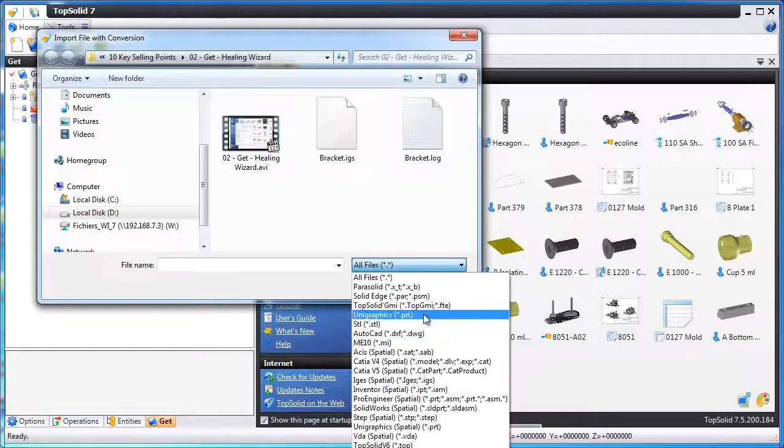First thing we'll do is import our IGES file. We'll change to IGES, select the file that we want to import, and validate. TopSolid 7 goes to work and imports the IGES file. Here you see it show up in our project tree.

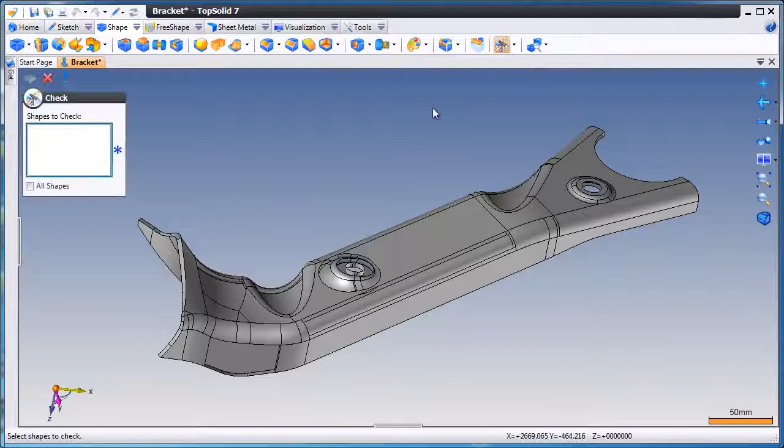Now let's take a closer look at the model. Maybe the first thing we want to do is run our healing wizard. First we want to check the geometry for errors. There are none, so we'll continue and have TopSolid automatically try to sew it. Here with these orange edges you see all the areas that are currently open, and we even give you a list telling you there's 10 holes open.

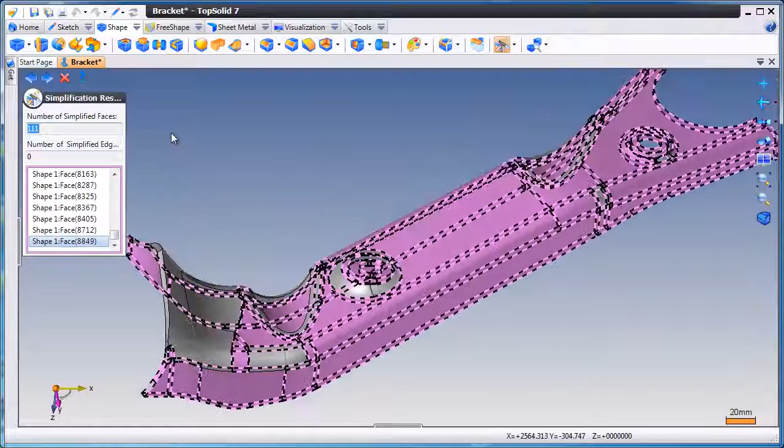Next we'll try to simplify all of the geometry as well. And finally we'll do one more check for anything that's invalid, and like that the healing wizard is complete. However, we still have work to do. First, to make things easier to see, we're going to change the color.

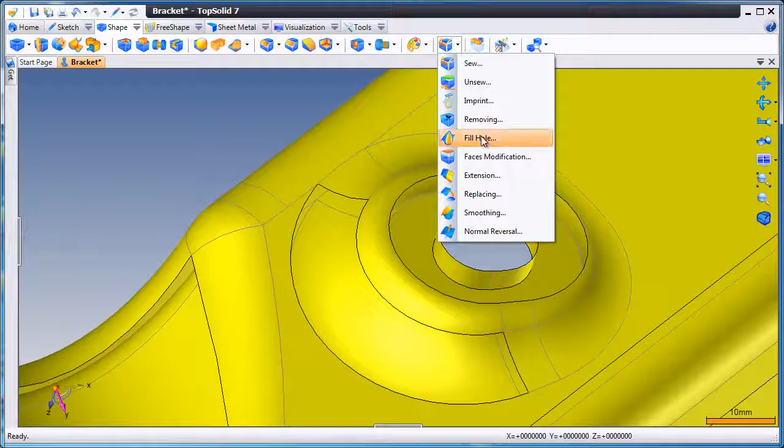Now let's see if we can close up some of these gaps. Maybe we'll start by choosing the fill hole command. As we fill holes, the software will automatically sew it to the model. And like that you can see it looks like those surfaces belong there as part of the native model.

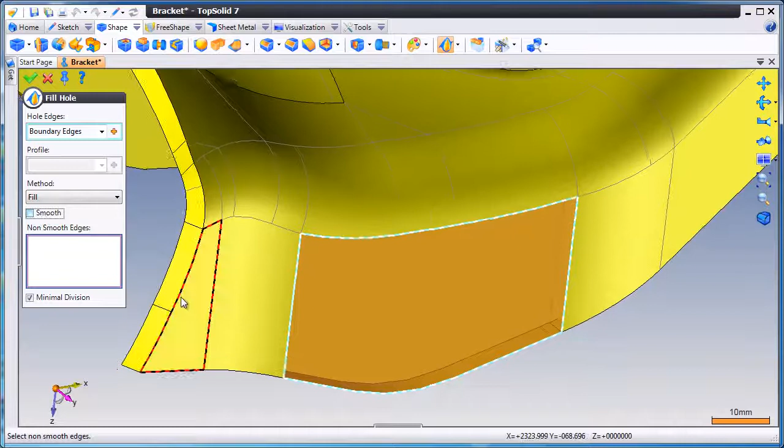Now let's go to this area. At first we don't see a preview because we have to turn smooth edges off, and it's because of the hard edge down at the bottom there. So like that we have filled quite a few holes.

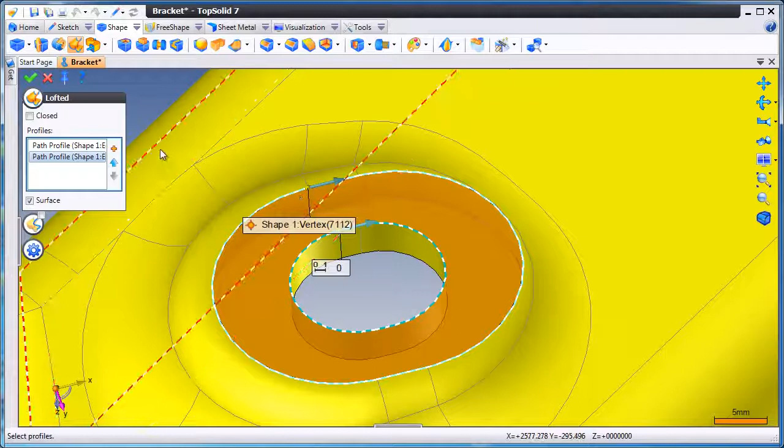Now here we have an internal and external boundary, so in this case we'll use a different command. We'll use lofted. We'll select that profile and that profile. If you notice, their sync points don't line up, so we'll just drag them around. And from there validate, and now we have our surface.

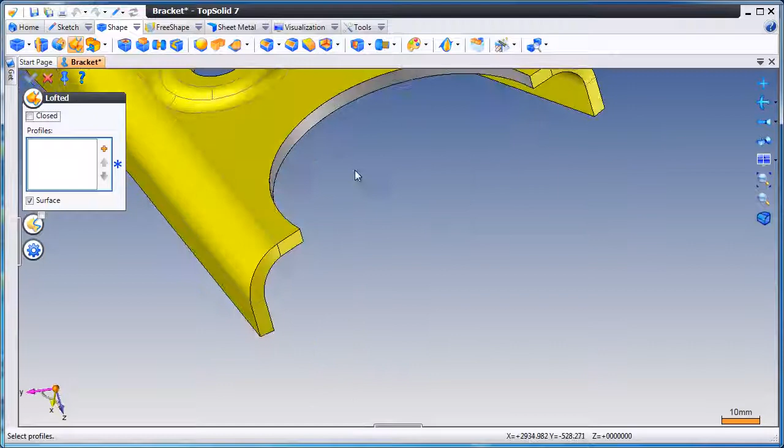Next, we'll go to the other end of the model and continue with the loft function. We'll go from that edge to that edge, double click to invert. Now we have our surface. Again, same thing over there, double click to invert. And one more time out here. And like that, we've made the three surfaces missing on that end of the model.

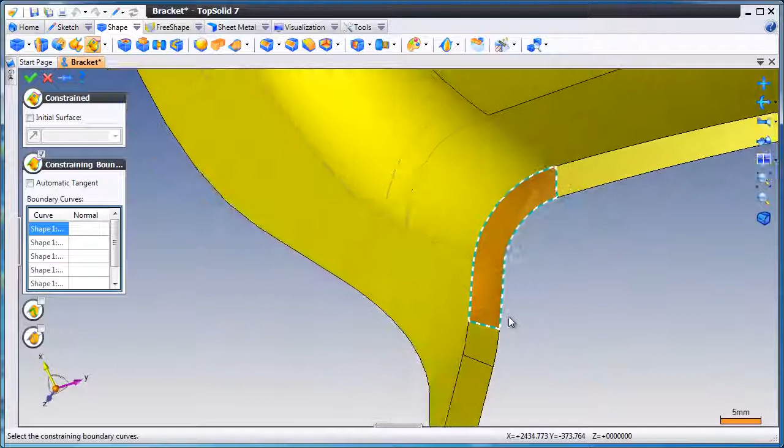Next we'll flip the part over and go to the other side. We'll zoom up, and in this case we'll use a constrained surface. What's really cool here is the fact that you can just directly select the edges of the model. You don't have to go and create any curves or anything, and like that TopSolid will create the surface automatically for that section.

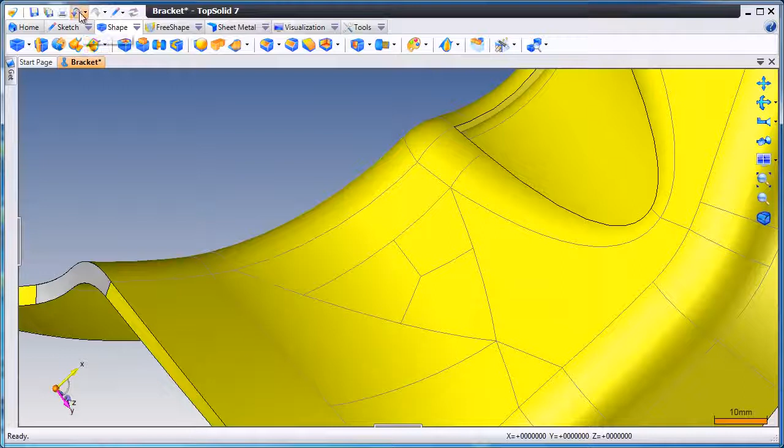Next, maybe we'll try to use fill hole again on this area. And what you'll see is that the software does fill the hole, but maybe the faces aren't ideally what you're looking for. So let's undo that and try a different solution.

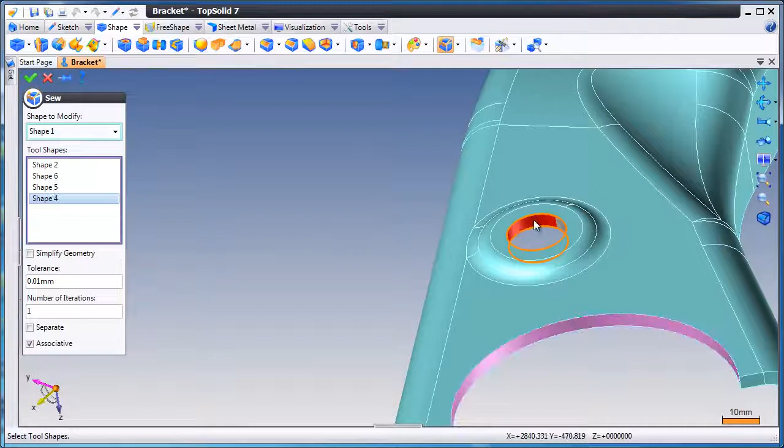First, however, maybe we'll go ahead and sew together everything we've done. Notice as we start sewing, the software is dynamically showing you the areas that are still open. As we select the surfaces that we used to fill in those holes, those orange edges are being removed dynamically. This is a great way to know that what you've created is going to work on the fly before you ask the software to actually do the operation.

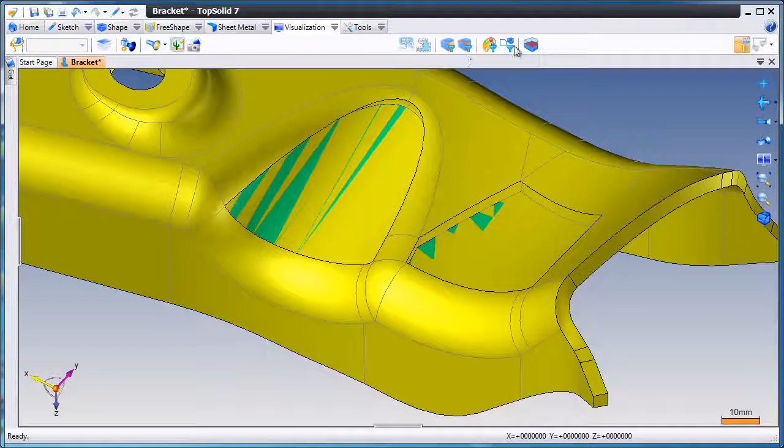Next we'll try something a little different. We're going to go ahead and make some copies of some faces. The reason we're going to copy faces is because this is really a sheet metal part. It's a formed part, therefore it should have a constant and uniform wall thickness. So we'll see if we can apply a little cheating method.

To start with, we're going to create a filter to make it easy to hide our part so we can see the two faces that we've copied. Let's go ahead and measure, and here we'll see that the wall thickness is 4 millimeters.

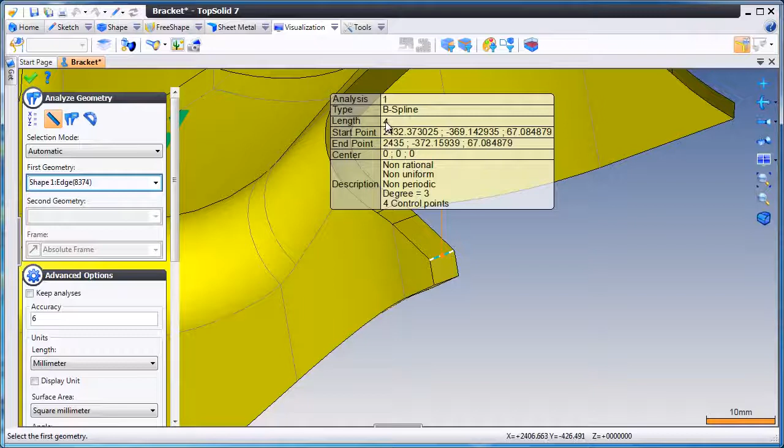Now we'll go ahead and activate that filter, and now let's see if we can offset these faces those 4 millimeters. Like that, we'll select the face, and you can see dynamically you can play with the offset value. You just double click right on the balloon out there, set it to 4. Do the same thing to that face, set it to 4, and validate.

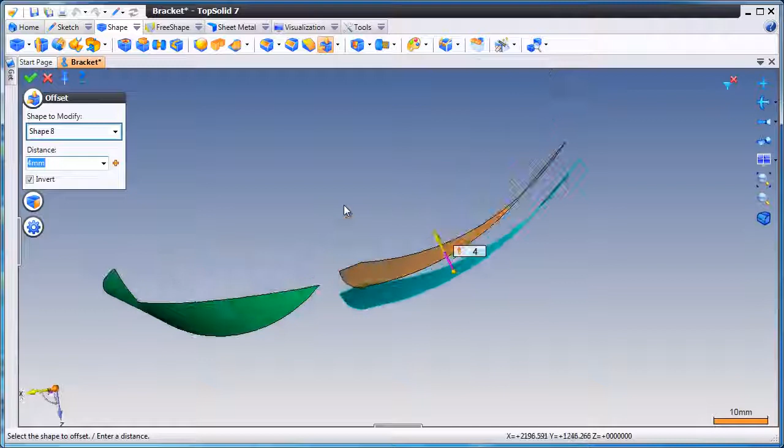Like that, let's deactivate our filter. The surfaces look great. Let's see if we can sew everything together. Looks perfect, and like that, we now have our solid model ready to work on inside of TopSolid 7.